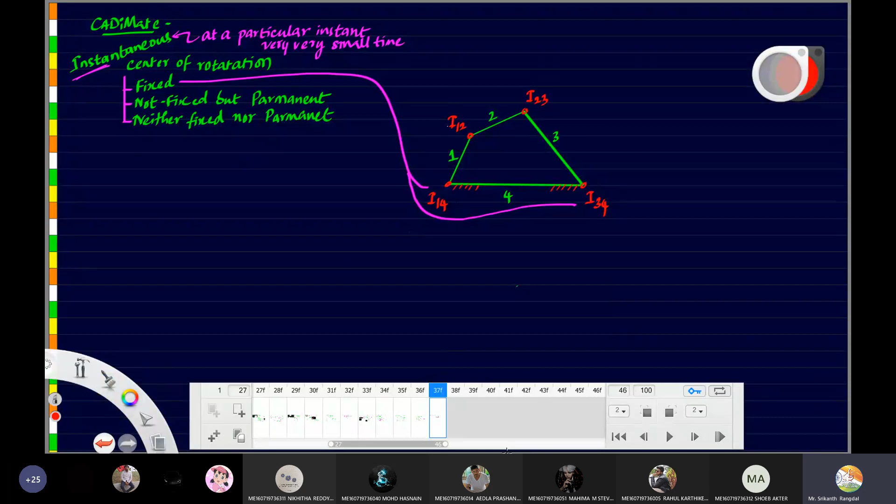So what about next? This is instantaneous center 1,2, and this is instantaneous center 2,3. Are they fixed or moving? Come on. Moving, sir. This point will be moving like this, and this point will be moving to and fro like this. So because they are moving, they can definitely not be called fixed.

But are they neither fixed nor permanent, or not fixed but permanent? Not fixed but permanent. Yes. So these two instantaneous centers are the second type. Now what about the third type, neither fixed nor permanent? Anyone? Cam and follower. No. In the same mechanism that I've drawn, you will be coming across both these types.

So to get this type, you have to extend the links. You have to extend link number 2 and link number 4, and at their intersection point we get one instantaneous center. Now, which instantaneous center is this? For this, we'll have to learn about a law called Kennedy's law.

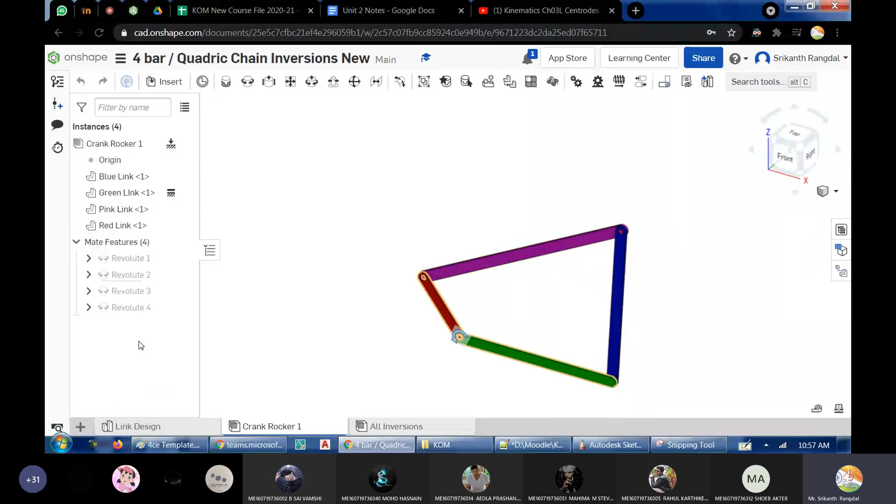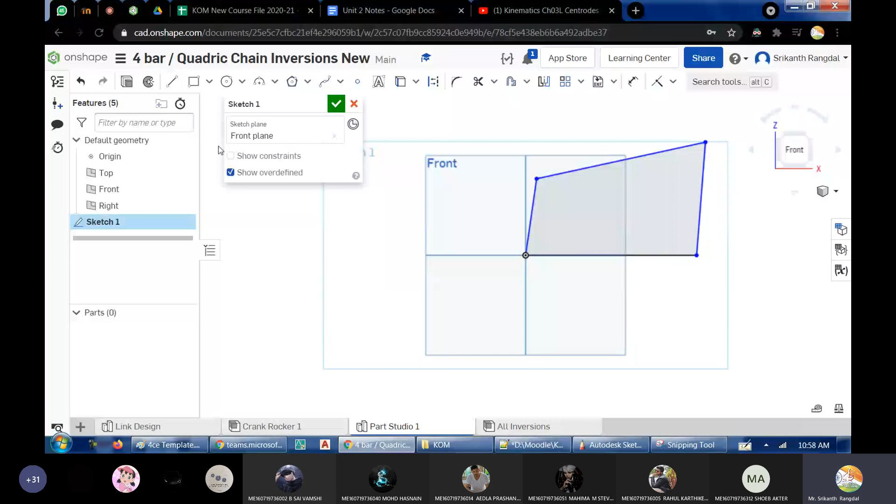So let me create another new part studio. I'll take a sketch because we will need it to see whether they are moving or not. So I'll quickly draw a 4-bar linkage and give some dimensions. Let's take 120. This one, let's take 80. This one I want very small compared to the previous, say 70. And this one again very small. So this is the mechanism.

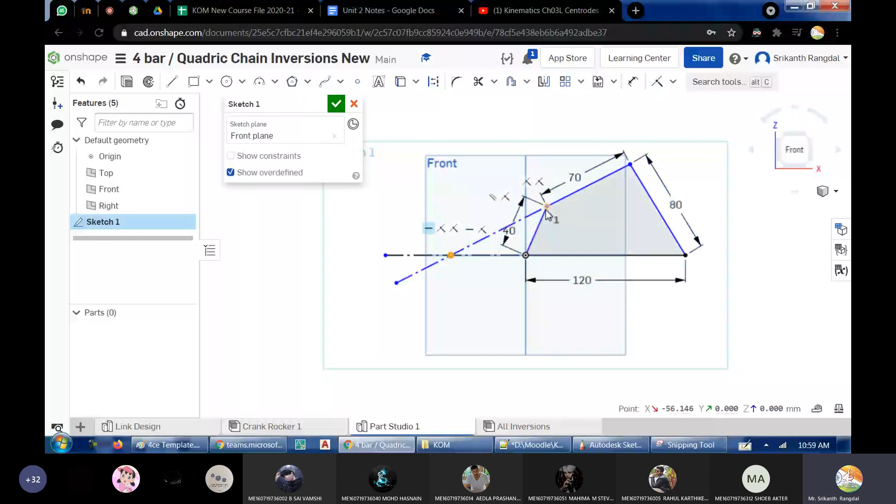Now we need the intersection of the extensions. This line extended, and one more, this line extended. So this is the common point. Now, when the mechanism is moving, is this point stationary? Are you able to see this?

No, sir, it is wobbling. It's wobbling. Okay, there is very little I can do about this wobbly thing. I hope the video is getting recorded anyway, so you may have to watch this part once again.

So I'm talking about this particular point. When I'm moving the mechanism, the length of links is not changing. Let me show you two positions, because it is wobbly. In this position, the point is here. In this position, the point is here. So let me delete this and make this coincident.

Let me take the first position here and place a point overlapping it. Right now the instantaneous center is here, but after the link moves, the point has moved to this particular point. So it is moving, so it is definitely not fixed. But is it permanent?

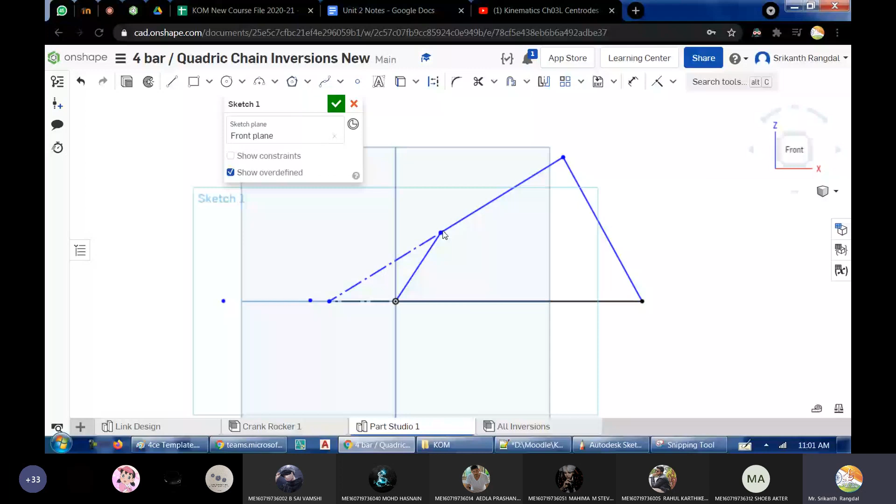So when the mechanism is moving, you can see that the lengths are also changing. If you want, I'll just show you the dimensions also. Let me make this a driven dimension. You can see right now it is 72 something. After the mechanism moves, now you can see it is 101.2. So the link length is changing.

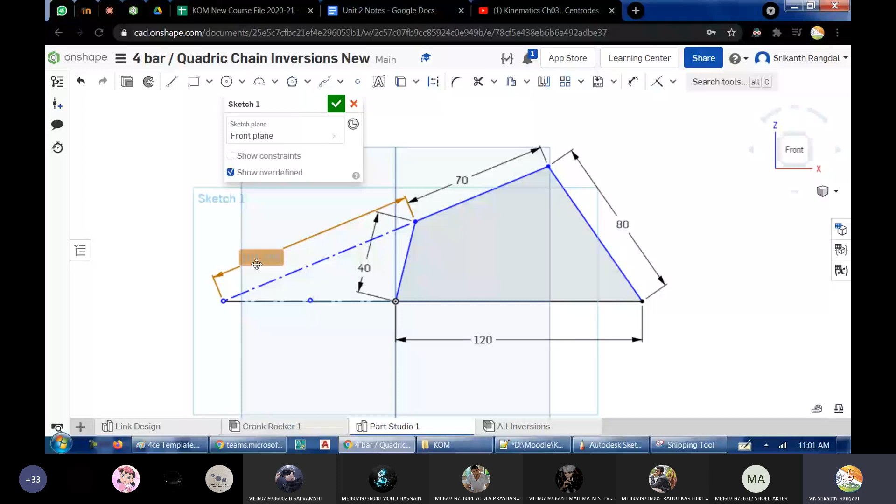Because the length is changing, we cannot call it permanent either. Hence, this particular link is of what type? It is neither fixed nor permanent. So up till now, how many instantaneous centers have we found? 1, 2, 3, 4, 5 instantaneous centers we have found.

So there is one more instantaneous center possible. What is the one more instantaneous center that is possible? We will have to take all the possible combinations. So let us say this 1, 2, this 2, 3, this 3, 4, then this 1, 3, then this 2, 4. Like this, we'll have to take all the possible combinations. And these two, 1, 4.

Once these are found, then we start finding the in-between instantaneous centers. Once every point has joined every other point, we have found all the instantaneous centers. Is this clear? Any doubts? So now some additional points I've given here. The links may be connected or not. Link number 1 and 3 are not connected, and their instantaneous center we are getting here. Same way, link number 2 and 4 are not connected, but their instantaneous center we are getting here.

Then this is the other name used for the theorem, three centers in line theorem. So whether you are asked Kennedy's theorem or three centers in line theorem, they are both one and the same, and you have to do the same explanation which we have done right here.

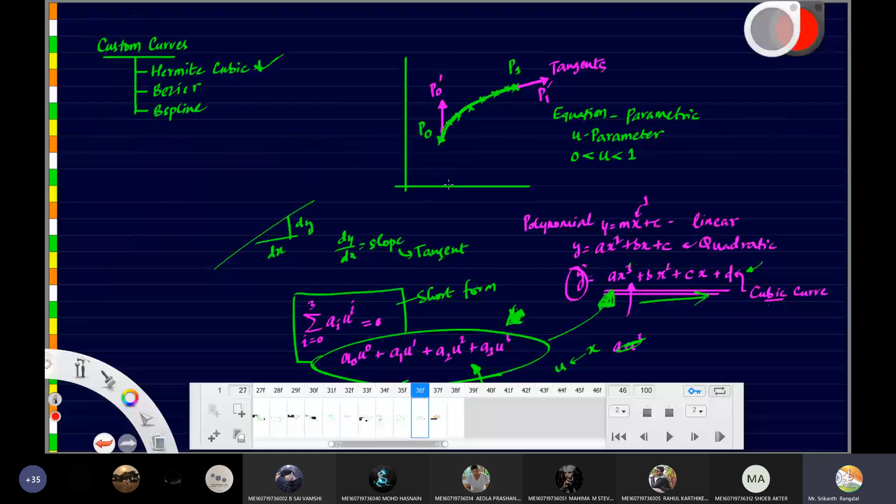Next, let us understand why we are finding the instantaneous centers. The answer is, this is one of the methods for doing velocity analysis. One method of analyzing velocity we already saw in the previous class, and that problem was so complicated because we used the diagram method. We had to draw one diagram for velocity, one for acceleration, and by measuring values from the diagram we found whatever we were asked.

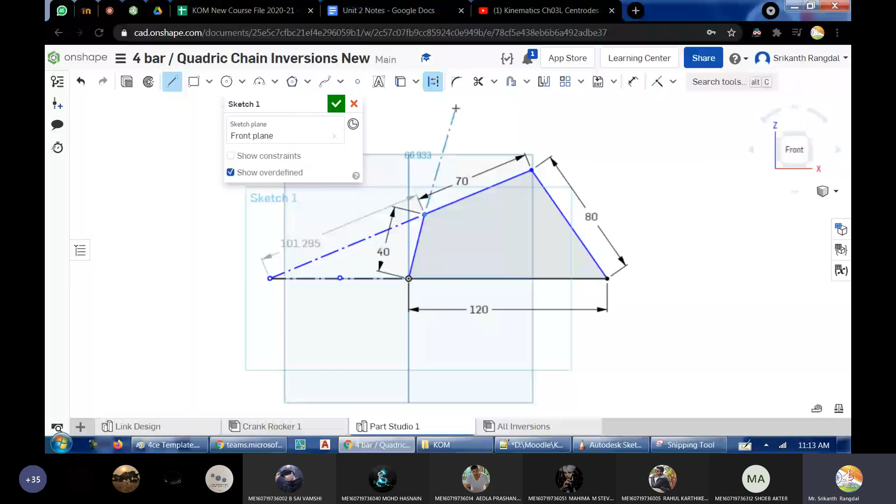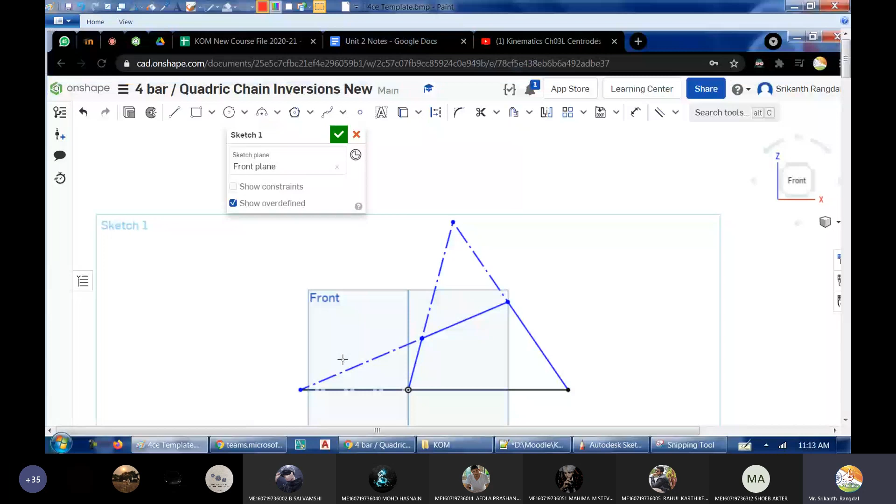Let me draw the two other lines as well, and then I'll take a screenshot of this for our use. I have to draw this parallel, and these two lines have to be parallel. These 2 points I'll remove; they are just temporary points. This is the diagram I was interested in. Color yellow. I was calling this 1, isn't it? Okay, sorry.

This link I had called 1, this is 2, this is 3, this is 4. This center is instantaneous center 1 4. Instead, let me give them names: A, B, C, and D. Now the velocity of point B will be perpendicular to AB, and the velocity of C will be perpendicular to CD, isn't it?

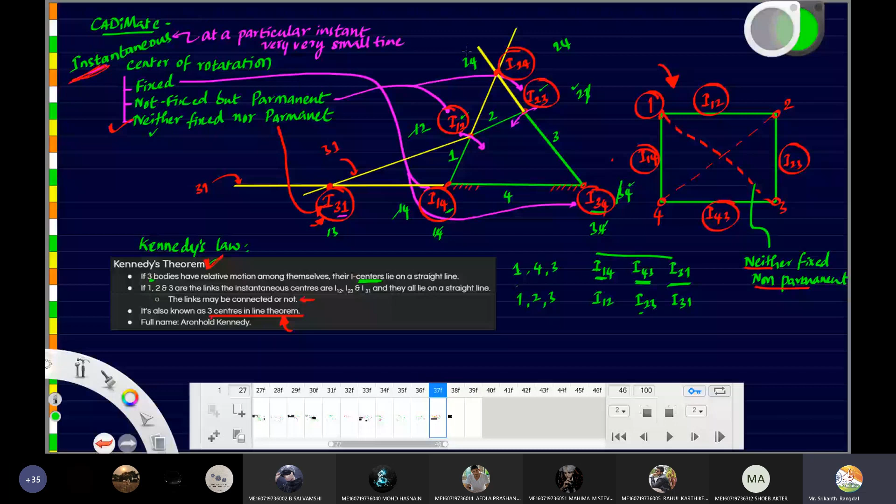Now at this particular instant, if you observe the rotational or angular velocity of 2 and 4, that will be constant. Angular velocity of 2 and 4, that will be constant. Fine. And what is the formula for omega? Or let me say, what is the formula for V? V is equal to omega into R.

So what happens to the formula for omega? Omega will be V by R, isn't it? So here this omega is constant, and that omega is same for Vc as well as Vb. So the angular velocity omega will be equal to velocity of C divided by R. What is the value of R here? R here will be the distance C to I24. Okay.

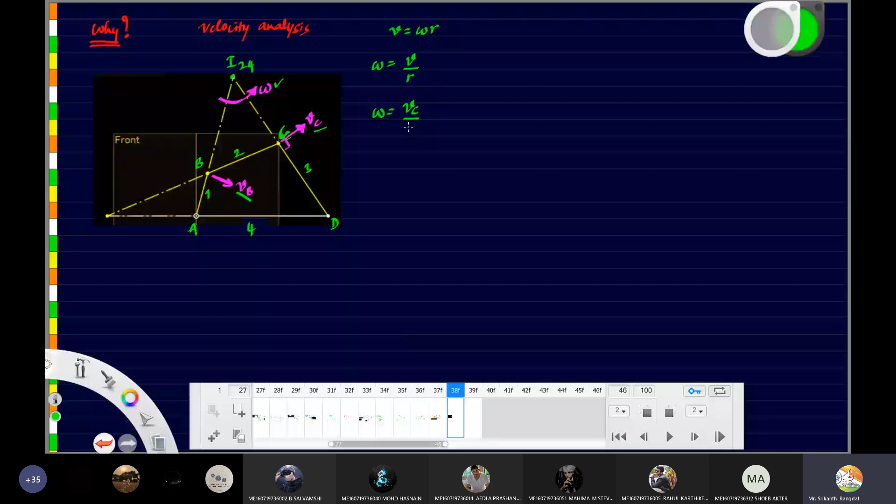And same way, velocity of B divided by this length. So what is that length? Length between B and I24. Are you getting it? So this relation you have to apply. Now, once you draw the diagram, you will be able to measure the length between B and I24, and the length between C and I24. For this particular position, both lengths will be known.

Now, if one of the velocities is given, you can find the other. Isn't it? Are you getting it? So these are the two relations. So let us take a small example. Let us say X by Y equal to W by Z. If three values are known in this, then the fourth value can be found, isn't it?

If there is only one variable in the equation, we can find that one variable very easily, right? So suppose X is to be found, then X will be equal to W into Y by Z. If you know W, Y, and Z, we can easily find X. If you want to find Z, then Z goes up, X comes down, so W into Y by X.

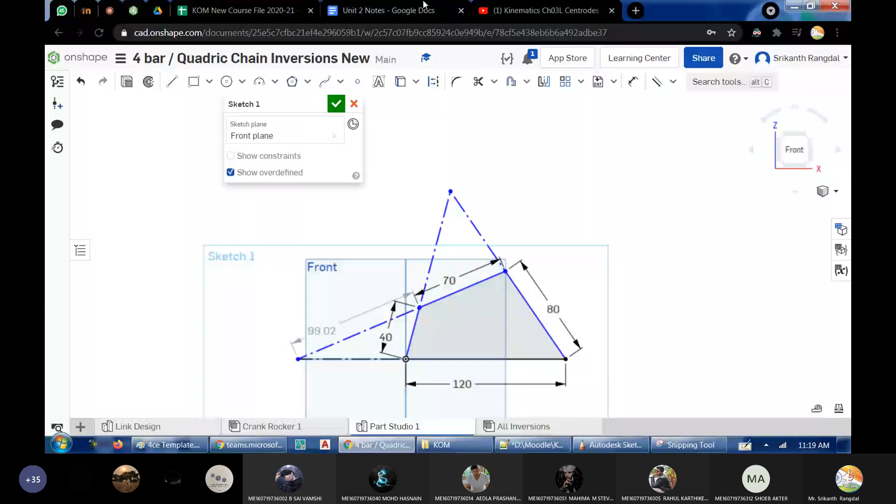So this is the logic we have to use. There are four values in all. If any three values are known, we can find the fourth. So this I can use in one of the problems; we'll do it. First, let us come back to this. So is this clear? Kennedy's theorem, and why and how we are using the instantaneous center. These two things are clear.

So is Kennedy's theorem applicable to only three bodies moving relative to each other? Yeah, of course. We have to take three bodies at one time. Here we have a total of 4 bodies, but we take 3 bodies at a time. So, for example, let us say you want to find these two velocities.

So let us say this point is fixed. Then how will the other two bodies move? This will move perpendicular like this, and this will move perpendicular to this line like this. Let us say V1, V2, and call this distance A and this distance B. When this link is fixed, these are the two velocities, and omega is constant. So omega becomes V1 by A or V2 by B.

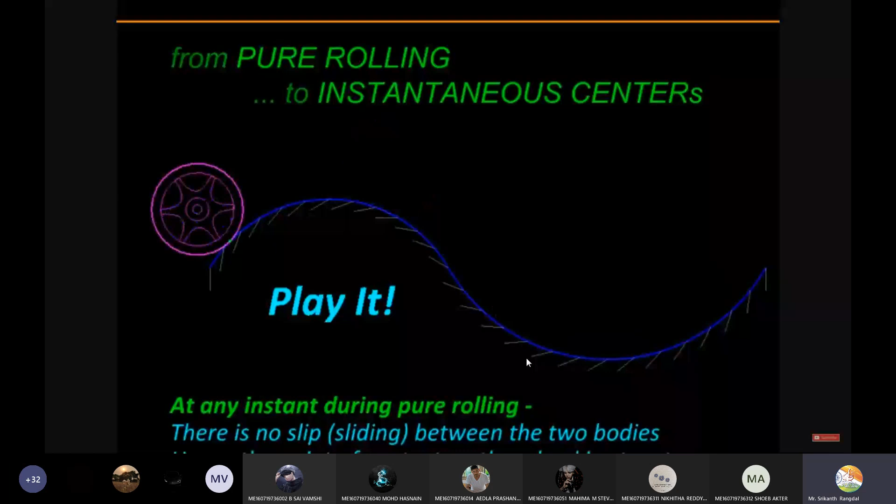So far, we have seen that any body in general plane motion can be considered to be pure rotation at a given moment. And the center of that rotation at that moment is called the instantaneous center. Instantaneous because it can change the next moment and shift. And as it shifts, if it traces a path, it's called the centrode. Let us look at one simple case of centrode. Say we have a wheel here, and that is moving without slip. And the wheel at any given moment is rotating about the point of contact with the road, and therefore that is its center, and its path is nothing but the road itself. So we are looking at the centrode here.

Let us now see the role centrodes play in mechanisms. So here we have the 4-bar mechanism. Link 1 is fixed. We already know that the pin here is the center I12, etc. And if we connect these centers using those lines, those are the loci of I13 that we know from Kennedy's theorem. And therefore we can locate I13 as a point of intersection. But that is true only at one instant. The next moment it will be located in a different position, and then shift here, here. So if we plot the locus of such positions, we are going to get the centrode, and because we are observing it keeping link 1 fixed, it is called the fixed centrode, or also called the space centrode.

Let us now repeat the same exercise, but this time we are going to place ourselves on link 3. That will appear fixed, and link 1 will appear to be rotating about the center, and its path is going to be slightly different. The point of intersection is not following the space centrode but a different path. Let us connect all positions and we get what is called the body centrode or the moving centrode because it is observed on the moving body. Now, although we are getting two distinct curves, the space centrode and body centrode, these two are paths of the same point. Therefore, they must always make contact at that point. But we don't see that happening. We see them making contact only here and nowhere else. So that is what we are going to see next.

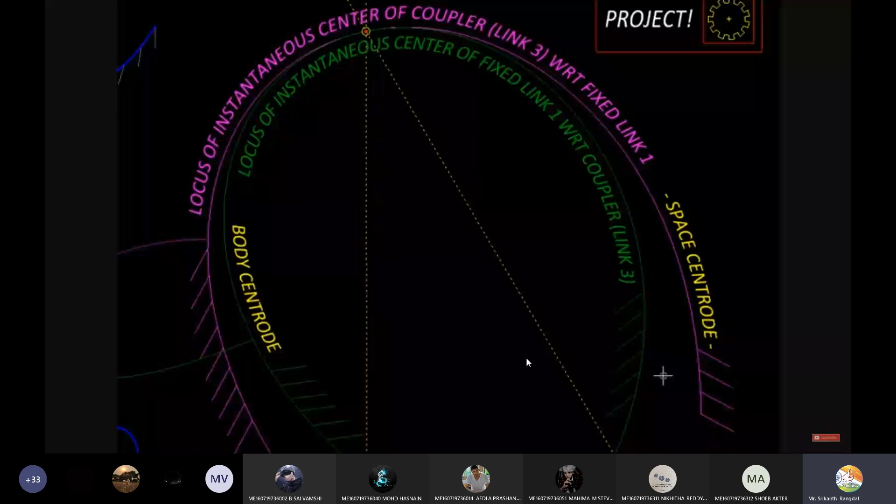So let us follow this schedule, which will allow us to see these centrodes. Here, we have filled inside of the body centrode to create this green shape. And then we have added some area to the fixed centrode to get this purple shape. The green shape is then attached to link 3. So as you can see, it only makes contact with the purple shape. So the green shape is actually making rolling contact with the purple shape.

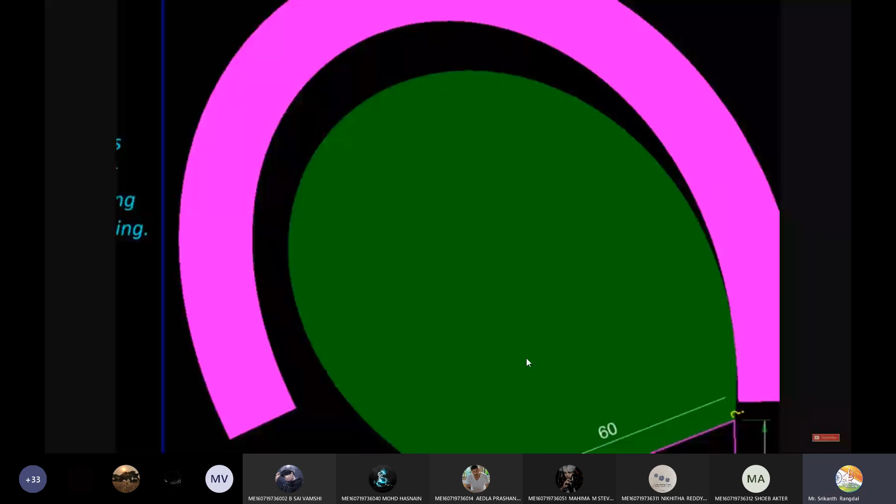And finally, an interesting reversal of cause and effect. See here, we started with the mechanism, the 4-bar, and that gave link 3 a certain motion, which in turn generated these centrodes. Now imagine you just have the centrodes, and you have done away with the mechanism, and this green centrode starts moving without slip on this purple one. Even then, link 3 will be taking an identical motion. So the centrodes can actually replace the mechanism.

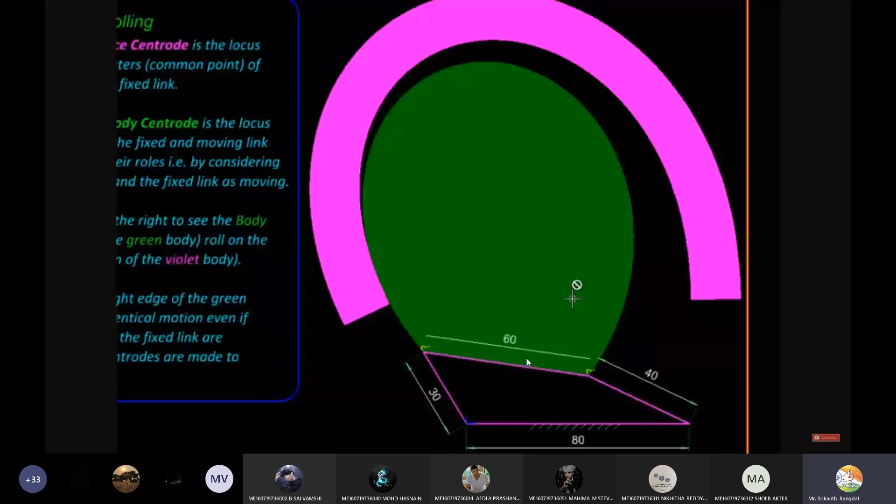Okay, so I hope everyone has watched this video. I gave you double the time required. The video was of 5 minutes. I gave you around 10.

So hoping that you have now understood what the video was trying to explain. Of course, you have the link with you. If you have not understood even after watching 2 times, after the class in the evening, you can watch it back. And if you have any doubts related to that, you can come back to me. I'll try to resolve that doubt as much as possible.

So in the video, you have seen something called space centrode or fixed centrode, and body centrode or moving centrode. So these are the two names given to the centroid. The centroid itself, what is centroid? It's the path traveled by the instantaneous center for a range of motion of the mechanism. Fine. So we have found the instantaneous centers.

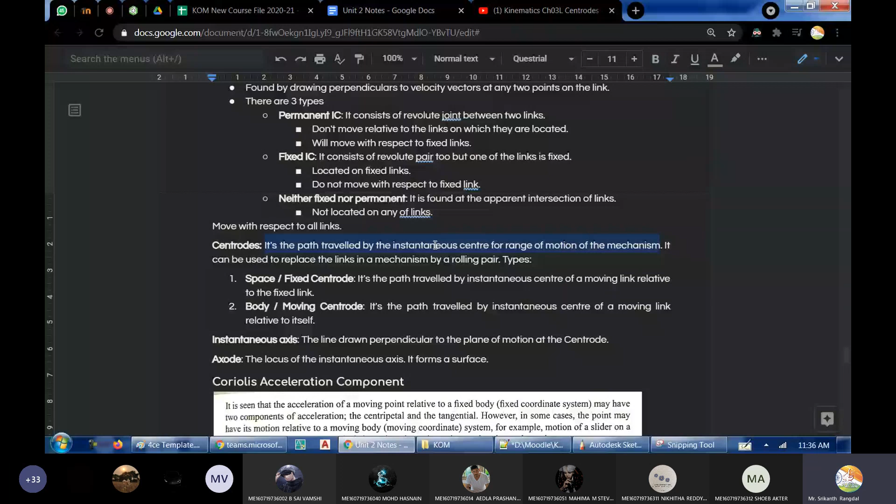So the two instantaneous centers that we found here, the one here and here, they were neither fixed nor permanent, right? So these type of instantaneous centers, when they move, the path on which these instantaneous centers move, that path is called as the centrode. Right. So now in the centroid itself, we came to know there are two types. One is the space centrode or fixed centrode, and the other is body centrode, also known as moving centrode.

Okay. And with these two centroids, if we make links, the body centrode is going to do a rolling motion, rolling without slip, on the space centroid. And the motion that this link will get will be the same as if these two links are attached. Fine. So even if we remove these two links, and only by using the space centroid and the body centroid we are getting the motion, that motion will be same as if the links are present. Okay. So this is about the space centroid and body centroid, or fixed centroid and moving centroid.

So with this, we will stop today's class. And in next class, probably we will take up the same problem, but we will try to solve it using this method. In the previous class, we had solved it using relative velocity or relative acceleration method, wherein we had used velocity diagram and acceleration diagram. In the next class, we will solve similar problems using instantaneous center instead of the velocity or acceleration diagrams. Yeah, any doubts?

Any doubts? No, sir. Everything is clear? Yes, sir.

Okay. So as I have been telling, this particular subject is a very unique subject. In whole of engineering for any branch, I think this is the most unique subject, because in this subject you're not only supposed to have the drawing skills, but also use the result of the drawings in the calculations. So there is no other subject requiring such combined skill level. Dynamics, I think, comes close enough. It requires mechanics, and in very few places, like CAMS, it uses a bit of drawing, but not so much as kinematics. Kinematics uses maximum amount of drawing skills combined with the calculation skills.

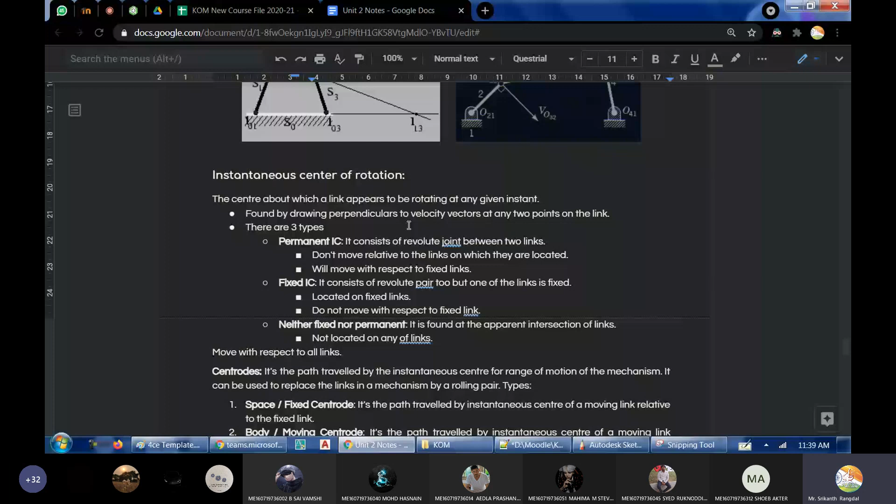So there is a lot of need for you to practice these diagrams again and again. As many problems as possible you have to solve, and only then you will become perfect. And in the exam, you will be able to solve the problems with confidence. In fact, even after being a good student, when I started teaching kinematics of machines, I got stuck in the class once or twice. And that is a very high possibility. If you don't want the same thing to happen to you in the exam, then you'll have to practice this really well.

And the second thing is, it may seem not very important from the exam point of view, because you have the choice in the long answer questions, and you may think we'll just leave it in the choice. But if you really want to be a good designer in the future, then kinematics is going to be a very important subject. This is like the soul of a living organism, and when there is no soul, the body is of no use, right? And if you are serious about being a good designer of mechanical machine parts, then you should be really perfect with the kinematics of machines. And I really suggest you practice as many problems as possible.

I'm always here to help you out. There are so many animated mechanisms present here in this Onshape. I'll share this to you if you need. But you should come up with a good amount of practice, and whenever you get any doubt, make sure you ask it in the class, and I will definitely try to solve it. Okay. So I guess the time is over.